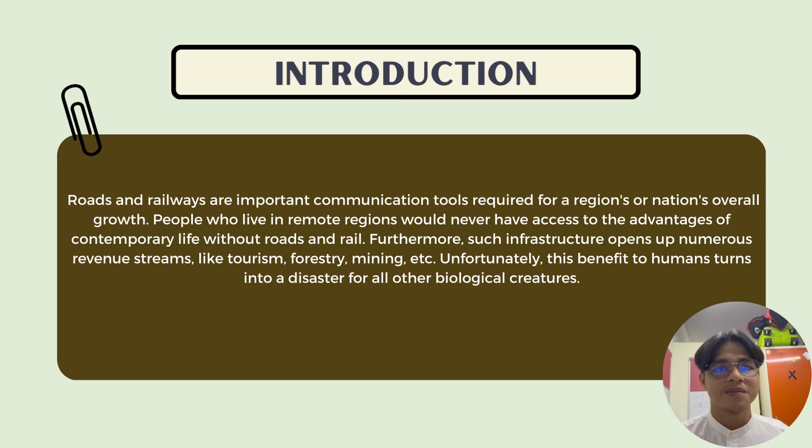Our group has decided to choose 4 SDGs, which is Goal 7, Affordable and Clean Energy, Goal 9, Industry, Innovation and Infrastructure, Goal 11, Sustainable Cities and Communities, and also Goal 12, Responsible Consumption and Production.

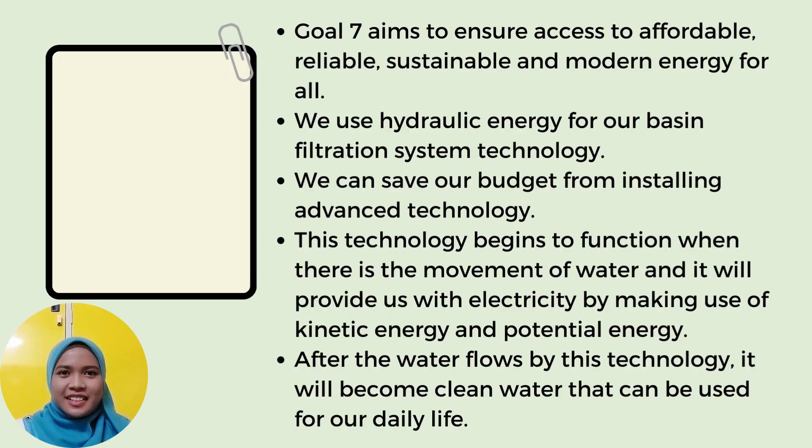To satisfy Goal 7 of the SDG strategies in this project, we use hydraulic energy for our basin filtration system technology. By using this hydraulic energy, we can save our budget from installing advanced technology that can cost us more. Our hydraulic system begins to function when there is movement of water, and it will provide us with electricity by making use of kinetic energy and potential energy from currents and waterfalls.

Furthermore, after the water flows through this basin filtration system technology, it will become clean water that can be used for our daily life.

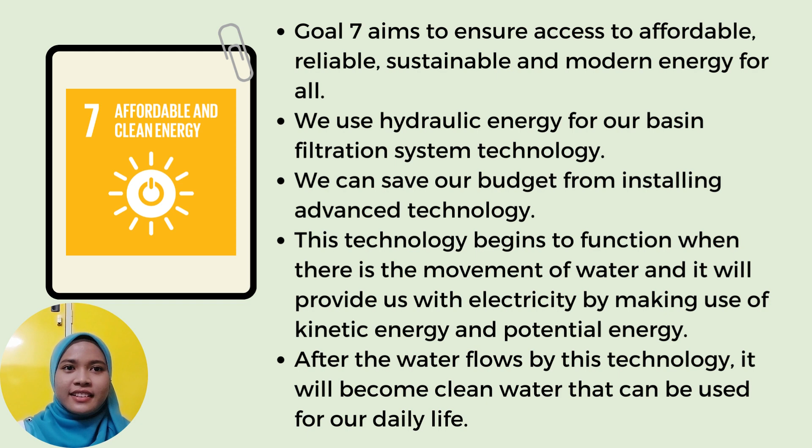For Industry, Innovation and Infrastructure, our group has decided to reuse and recycle our materials, such as concrete and stainless steel, in our project. We can save our environment from producing more materials that can pollute our environment. So we have decided not to use new materials for our project.

Can't deny that there are more advantages when we reuse and recycle material, whether for our earth, environment or for ourselves. In order to achieve this goal, we need to upgrade our material use so that it becomes more eco-friendly for our earth, usable for a long term ahead. We also can spread new information and financial market around the world that can be used by other people.

From this project, we can see that constructing an underground stormwater storage tank can be used to achieve Goal 11 of the Sustainable Development Goals. It is required to do many things when we install this underground stormwater storage tank, such as construction of concrete water storage structures, vaults and many more.

The more complicated things that need to be installed, the more workers' energy that will be needed. This will open opportunities for other people who are searching for jobs to support their life, so that people who live in remote regions can develop their own environment and cities.

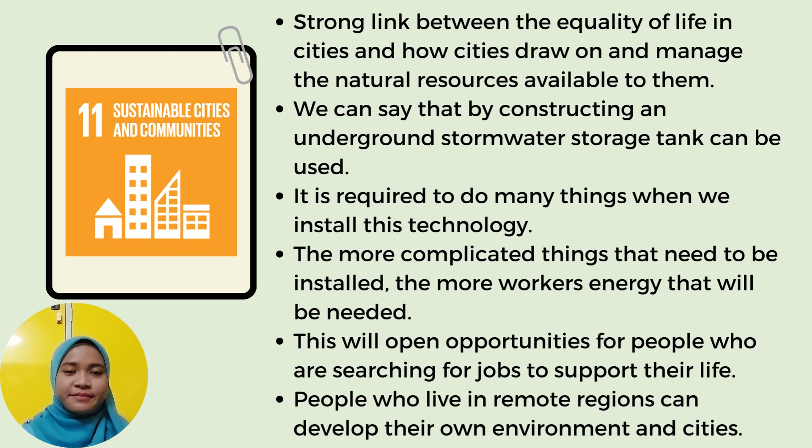By practicing the 12th goal of the SDG strategies in our project, we can use rain gardens for highways to make the transition towards a greener global economy for our earth. By using this technology, we can save our environment from installing other technologies that can do harm to our environment. Although, we also can manage to keep our goals to do the Go Green concept.

The more we plant, the greener the earth. Surely it does not bring any disadvantages to our environment, but can give many benefits to the earth.

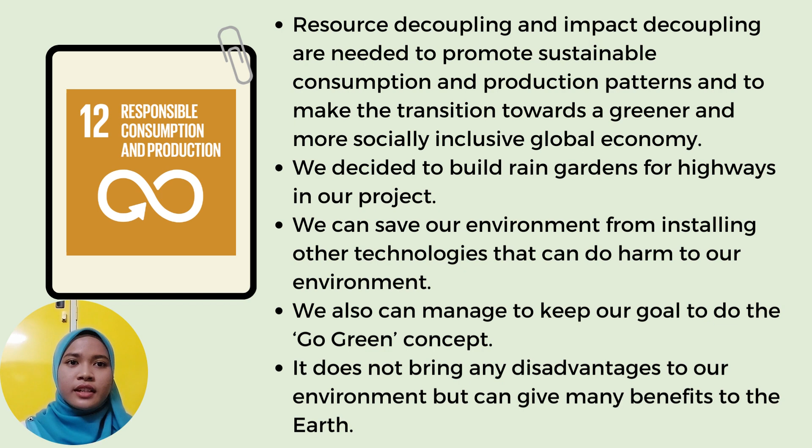All we need to do is plant native shrubs, perennials and flowers along the highways. Rain gardens will collect rainwater running off from roofs, driveways, and lawns. There is no need to use other technologies which can pollute the environment.

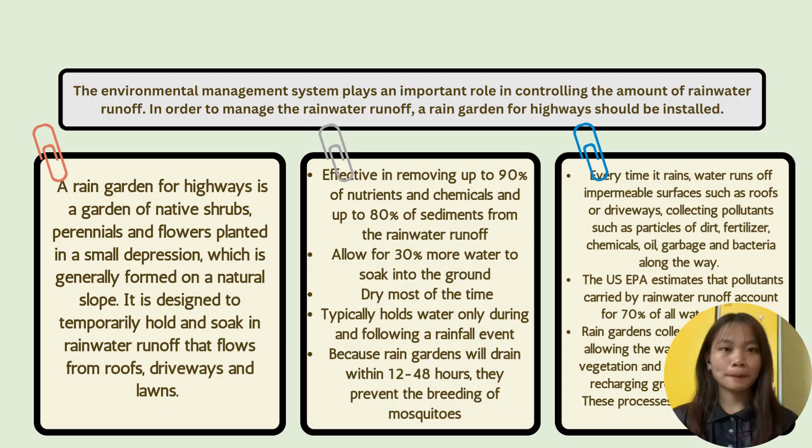My name is Ashana Binti Rasmain, and I'm going to explain about 3.1, which is Environmental Management System. The Environmental Management System plays an important role in controlling the amount of rainwater runoff, and in order to manage the rainwater runoff, a rain garden for highways should be installed.

A rain garden for highways is a garden of native shrubs, perennials, and flowers planted in a small depression, which is generally formed on a natural slope. It is designed to temporarily hold and soak in rainwater runoff that flows from roofs, driveways, and lawns.

Rain gardens are effective in removing up to 90% of nutrients and chemicals and up to 80% of sediments from the rainwater runoff. Compared to a conventional lawn, rain gardens allow for 30% more water to soak into the ground.

A rain garden is not a water garden, pond, or wetland. Conversely, a rain garden is dry most of the time. It typically holds water only during and following a rainfall event. Because rain gardens drain within 12 to 48 hours, they prevent the breeding of mosquitoes.

Every time it rains, water runs off impermeable surfaces such as roofs or driveways, collecting pollutants such as particles of dirt, fertilizer, chemicals, oil, garbage, and bacteria along the way. This pollutant-laden water enters storm drains untreated and flows directly to nearby streams and ponds. The US EPA estimates that pollutants carried by rainwater runoff account for 70% of all water pollution.

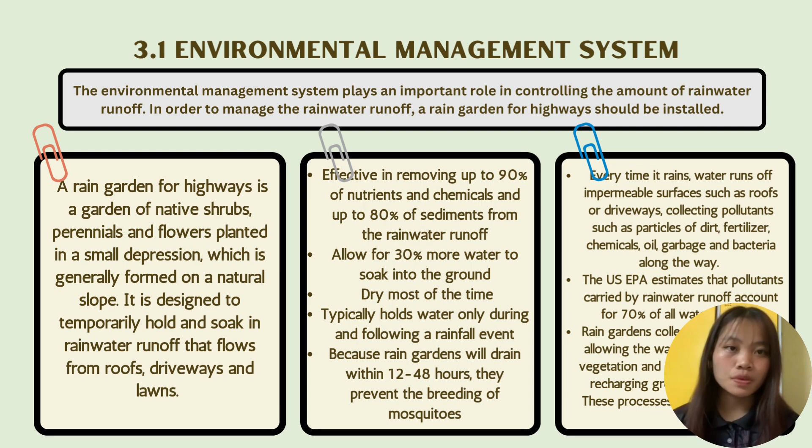Underground stormwater retention accomplishes the capture and storage of stormwater collected from surrounding impervious area. Riser pipes or curb cuts lead surface stormwater to subsurface vaults or a system of large diameter interconnected storage pipes or chambers. Stored water is then released directly through an outlet pipe back into natural waters at rates designed to reduce peak water flows during storms, to mimic pre-development conditions.

In some cases, stored water can be allowed to infiltrate to recharge groundwater. Underground stormwater storage provides minimal stormwater quality benefits, but can be a successful segment to a development's overall stormwater management plan when coupled in line with other stormwater BMPs.

The addition of pre-treatment features at the system inlet can facilitate improvement to water quality by removing floatables, skimming oil and grease, and trapping some level of sediments through deposition. Pre-treatment is most important if stored water is to be allowed to infiltrate into the soil; otherwise, rapid clogging of the system could occur. Pre-treatment features can be designed and built into the system, or they are commercially available as prefabricated units that can be incorporated within the system during initial planning and design.

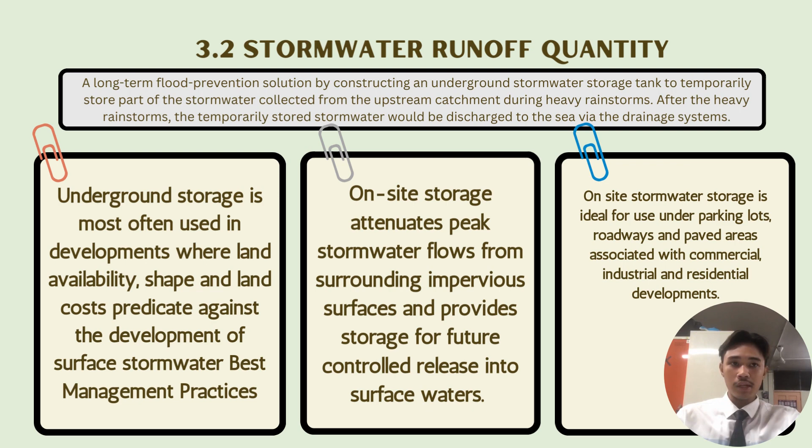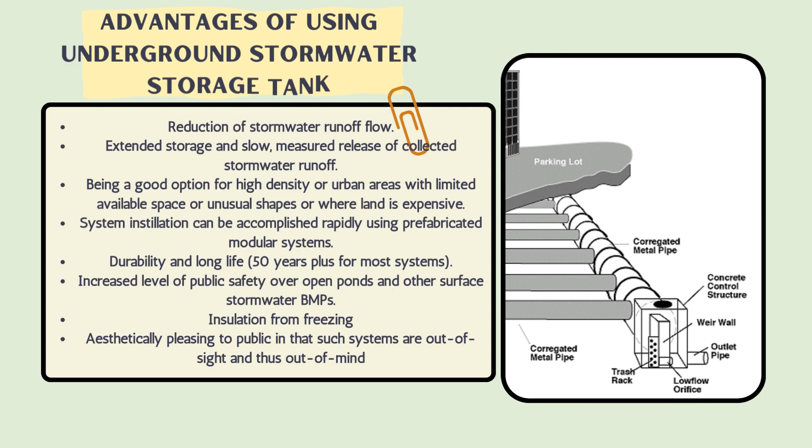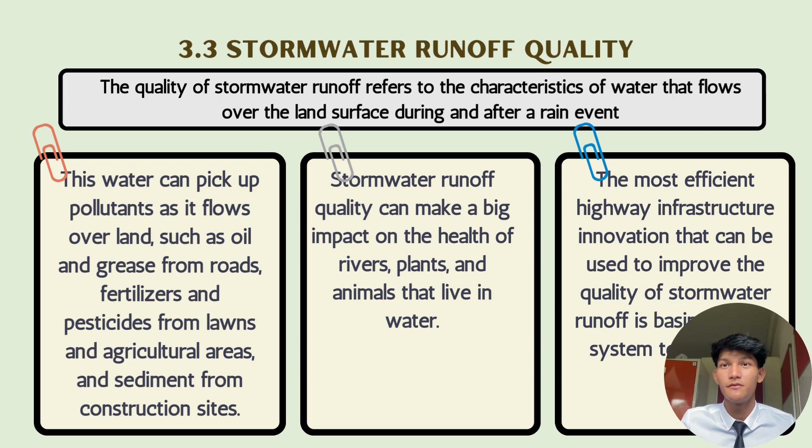The quality of stormwater runoff refers to the characteristic of water that flows over the land surface during and after a rain event. This water can pick up pollutants as it flows over land, such as oil and grease from roads, fertilizer from lawns and agricultural areas, and sediment from construction sites. Stormwater runoff quality also can make a big impact on the health of rivers, plants and animals that live in water.

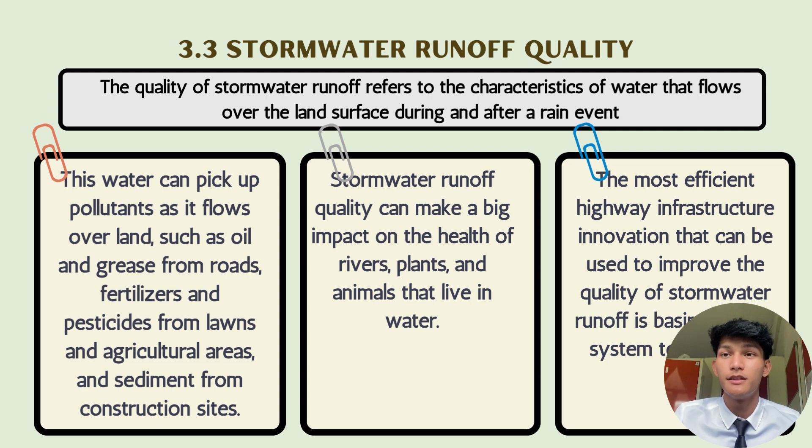So the most efficient highway infrastructure innovation that can be used to improve the quality of stormwater runoff is basin filtration system technology. How does basin filtration system technology work? When stormwater runs off into the basin filtration system technology, the cartridge filter will trap all solid and soluble pollutants.

After that, the clean water will be channeled to the underground stormwater storage tank, while trash and debris can be removed with a vactor hose. Besides that, this technology uses a hydraulic system. When stormwater enters the basin filtration system technology, it will rotate the turbine so that it does not require high expenses to ensure the system works. So it relates with Sustainable Development Goal 7, which is affordable and clean energy.

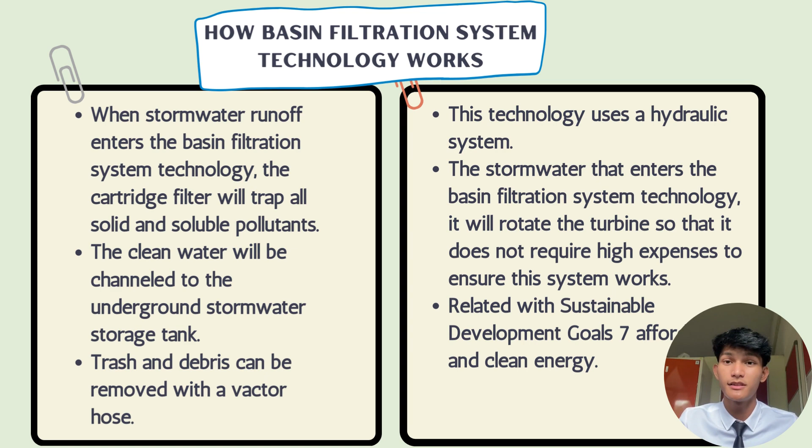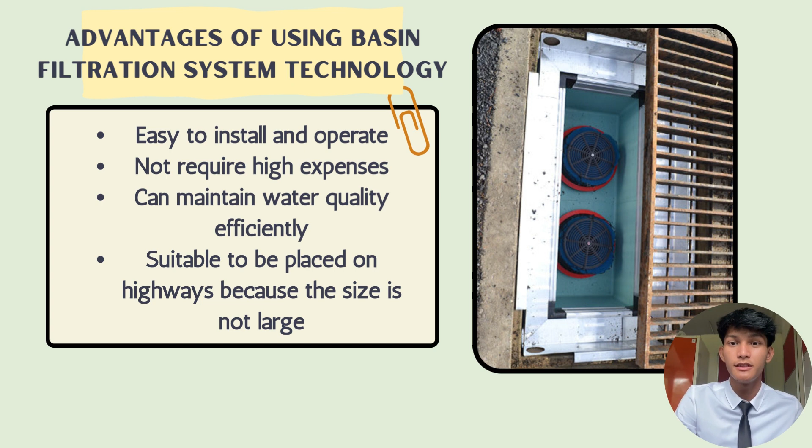There are many advantages of using basin filtration system technology. First, it's easy to install and operate. Second, it does not require high expenses. Third, it can maintain water quality efficiently. And it is also suitable to be placed on highways because the size is not large.

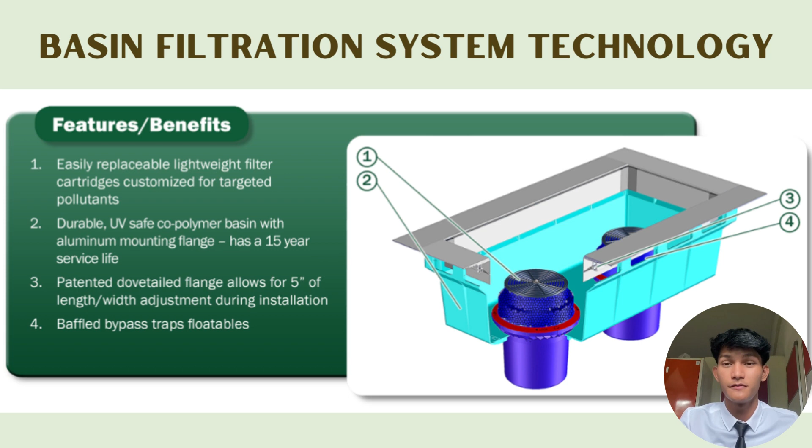This is the design of basin filtration system technology. You can see it has a filter cartridge, durable UV-safe copolymer basin, dovetail flange, and it also has a baffle bypass to trap floatables.

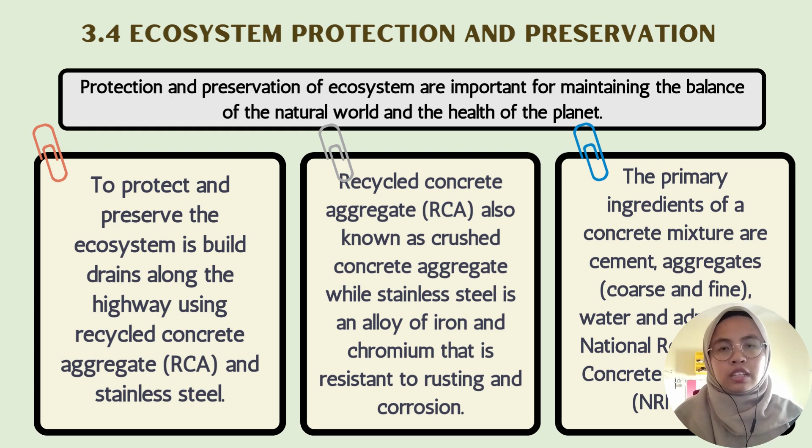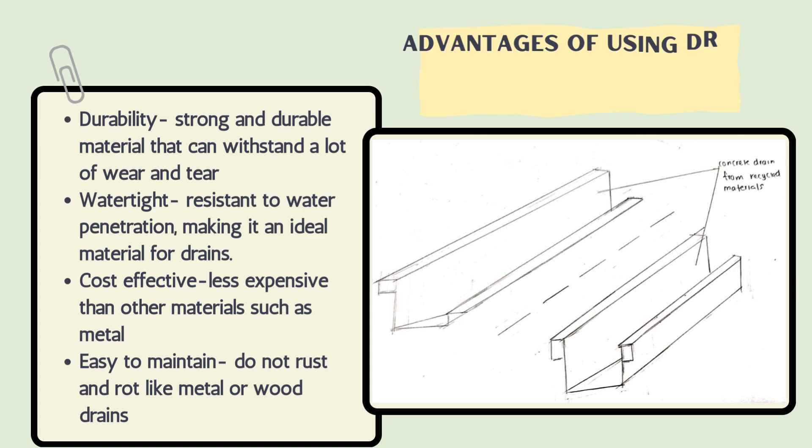In conclusion, engineers have a significant role in society, using their knowledge and skills to design and build the products, systems, and structures that shape our world. As professionals, engineers have a responsibility to use their expertise ethically and to consider the impacts of their work on society. This includes adhering to codes of ethical conduct, thinking about the safety and well-being of the public, protecting the environment, and acting with integrity and honesty in their professional endeavors.

Overall, there are many strategies that can be implemented to support the achievement of the SDGs related to environmental and water management in the context of highway innovation. It is important for governments, businesses, and individuals to work together to implement these strategies in order to create a more sustainable and equitable future. That's all from us, thank you.